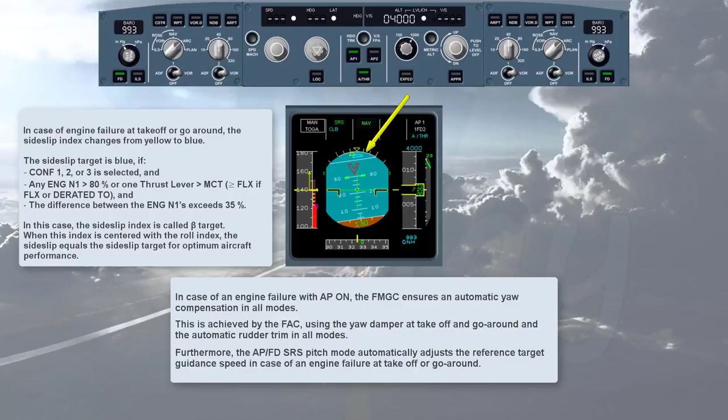Low speed protection is achieved by the following features: the auto thrust speed mode, the low energy warning, the alpha floor protection, and the wind shear protection. When the auto thrust is on and in speed mode, if the speed target is selected by the pilot on the FCU and the speed target is below VLS, the auto thrust will not allow the speed to decrease below VLS.

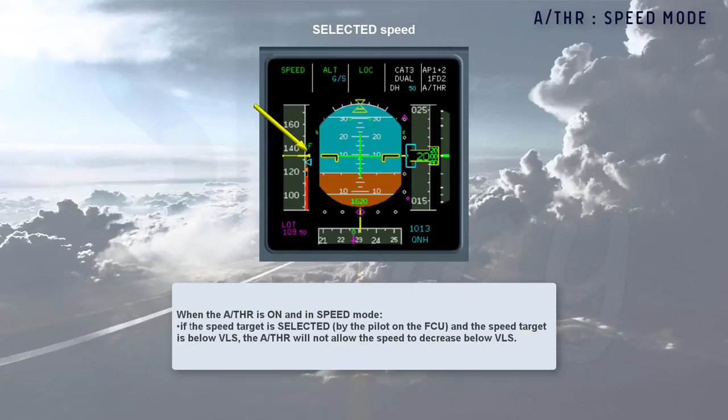Speed, speed, speed. If, for any reason such as turbulence, shear, auto thrust off, the aircraft speed drops significantly below VLS, a repetitive speed, speed, speed aural warning is automatically triggered by the FAC. It drives pilots' eyes to the speed scale, so as to readjust thrust, for example.

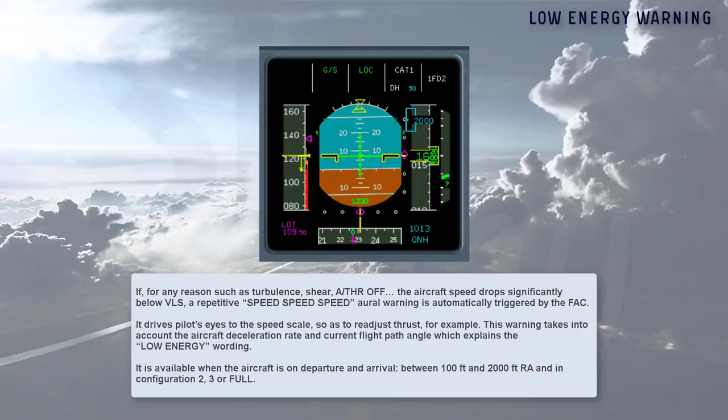This warning takes into account the aircraft deceleration rate and current flight path angle, which explains the low energy wording. It is available when the aircraft is on departure and arrival between 100 feet and 2000 feet radio altimeter and in configuration 2, 3 or full.

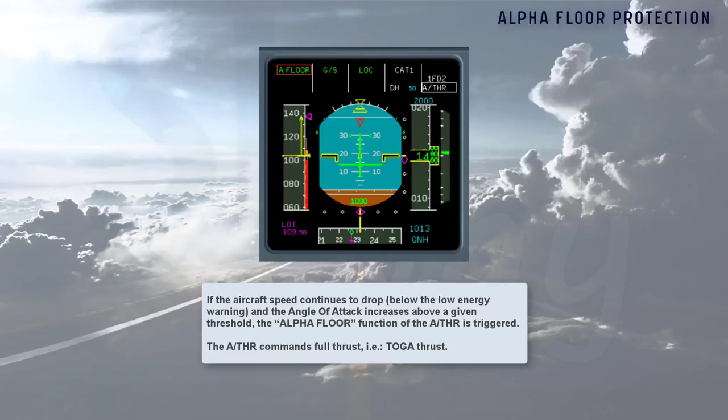If the aircraft speed continues to drop below the low energy warning and the angle of attack increases above a given threshold, the alpha floor function of the autothrust is triggered. The autothrust commands full thrust, i.e. TOGA thrust. The angle of attack threshold, which triggers the alpha floor protection, is processed by the FAC as a function of aircraft parameters such as configuration, weight.

When alpha floor is triggered, autothrust is turned on if it was previously off, indicated by a white autothrust on the FMA. Alpha floor in green is displayed as the autothrust mode. The alpha floor function is available from liftoff down to 100 feet radio altimeter.

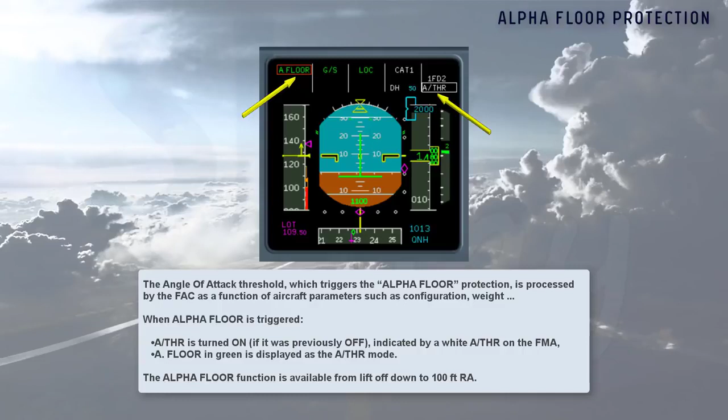Note: the alpha floor protection is lost in cases of combinations of failures such as SFCC1 and FAC2, or both FMGCs, or the alpha floor protection is also lost in case of engine out when slats flaps are extended above configuration 1.

When exiting the alpha floor conditions, the autothrust mode reverts to TOGA lock mode, which indicates that TOGA thrust is locked regardless of thrust lever position. To regain thrust control, you have to switch off the autothrust. You now have manual control of the thrust. You may re-engage the autothrust when convenient.

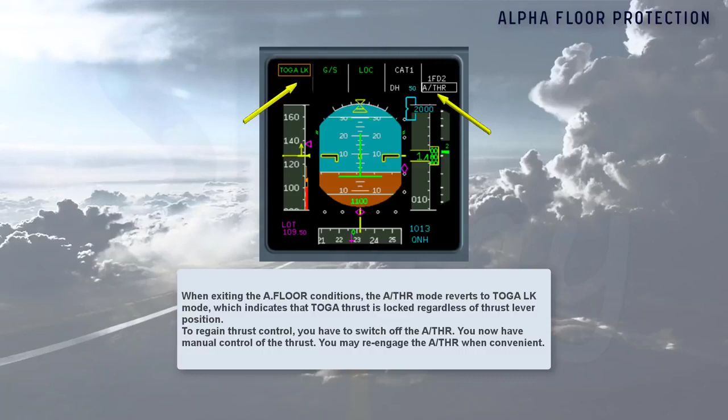Wind shear, wind shear, wind shear. If the aircraft encounters wind shear conditions detected by the FAC, a red wind shear message is triggered on both PFDs, associated with an aural wind shear, wind shear, wind shear warning. This reactive wind shear warning is available from liftoff to 1300 feet at takeoff and from 1300 feet down to 50 feet during landing, with at least Conf 1 selected.

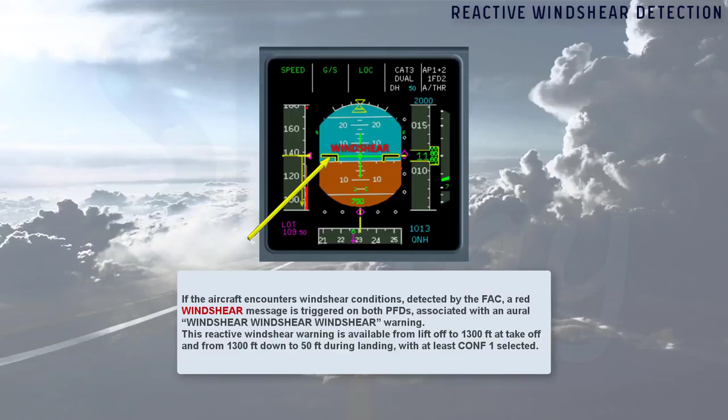The FMGC provides the following protections against wind shear. At takeoff and go-around, with the Autopilot Flight Director Speed Reference System vertical mode, which commands a pitch, ensuring a minimum positive rate of climb despite a potential speed drop. In approach, with the ground speed mini function, the managed speed target in approach is automatically adjusted with wind variations so as to ensure that the aircraft ground speed does not drop below a minimum value.

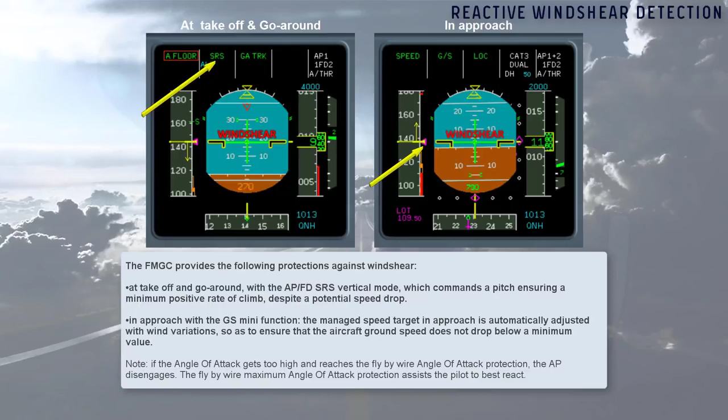Note: if the angle of attack gets too high and reaches the fly-by-wire angle of attack protection, the autopilot disengages. The fly-by-wire maximum angle of attack protection assists the pilot to best react.

Let's now review the mode reversions of Autopilot Flight Director and Auto Thrust. The mode reversions are automatic mode changes which allow a comprehensible autoflight system behavior when the pilot modifies a target on the FCU, happen in case of loss of navigation mode, and ensure a flight envelope limit speed protection.

Let's review the reversion due to FCU altitude changes. Autopilot is on. Suppose we are in climb, using either open climb or climb to flight level 250 as cleared by ATC. While crossing flight level 225, ATC requires us to level off at flight level 220. We therefore select the FCU target altitude to flight level 220.

The Autopilot Flight Director vertical mode reverts to vertical speed on the current vertical speed value. Notice also that altitude blue is not armed. It is then up to the pilot to decide how to regain flight level 220, by dialing the desired vertical speed target, i.e. down to -1000 feet, or by pulling the altitude selector to engage open descent. Note, you can imagine the same scenario in descent.

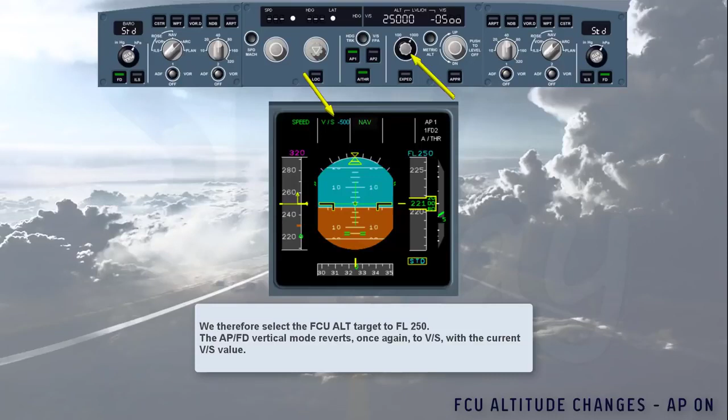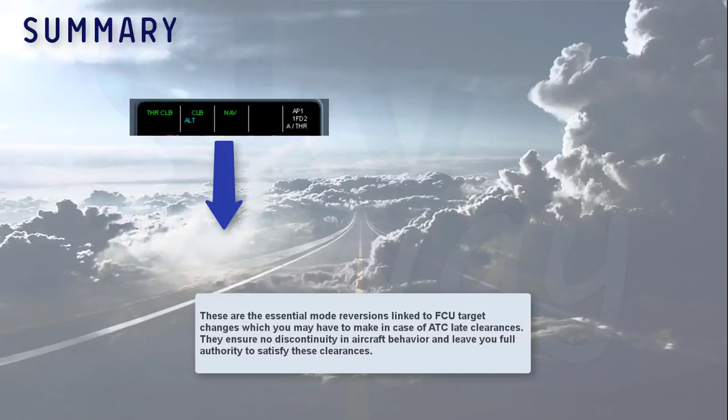It is now up to the pilot to decide how to regain altitude target, by pulling the altitude selector to engage open climb, or by dialing the desired vertical speed target, i.e. up to plus 1500 feet. These are the essential mode reversions linked to FCU target changes which you may have to make in case of ATC late clearances. They ensure no discontinuity in aircraft behavior and leave you full authority to satisfy these clearances.

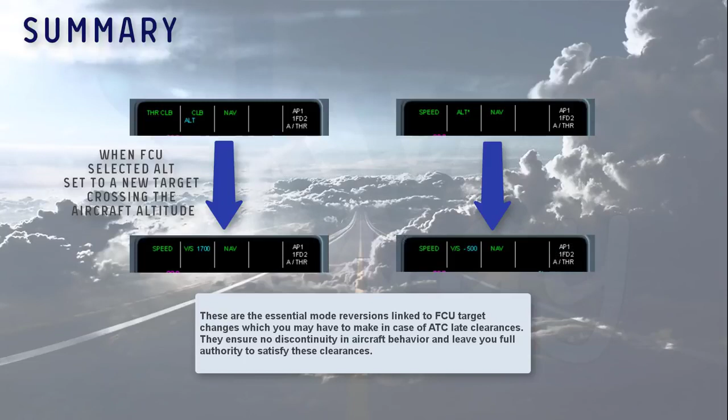Let's review the reversion mode due to the loss of navigation mode. Suppose we are in climb using climb to flight level 150 as cleared by ATC. While reaching flight level 90, ATC requires us to turn to heading 340. We therefore select the FCU target heading to 340. The Autopilot Flight Director vertical mode reverts from climb to open climb as the lateral mode navigation is replaced by heading. The aircraft pitch behavior is unchanged.

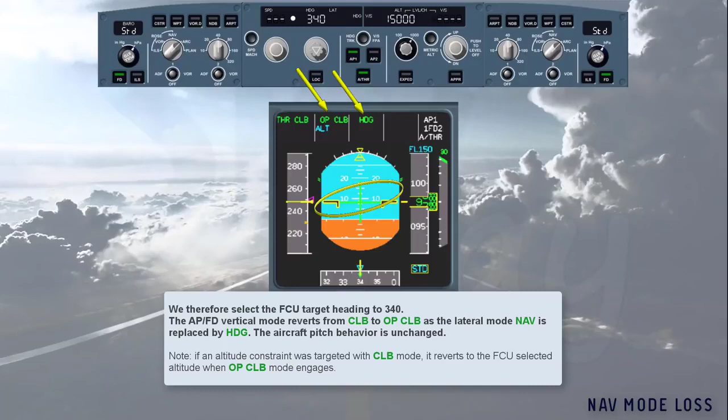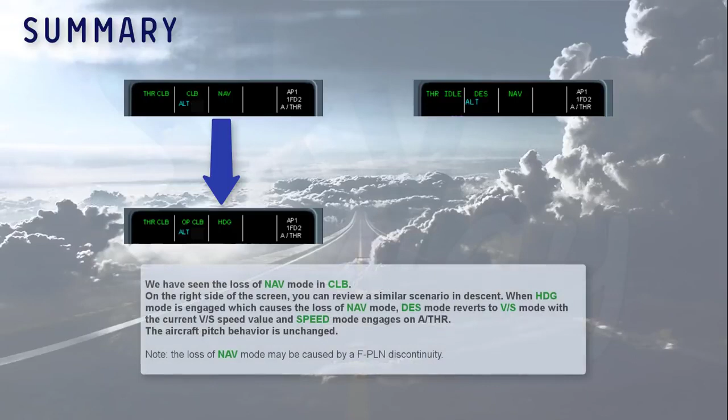Note, if an altitude constraint was targeted with climb mode, it reverts to the FCU selected altitude when open climb mode engages. We have seen the loss of navigation mode in climb. On the right side of the screen, you can review a similar scenario in descent. When heading mode is engaged, which causes the loss of navigation mode, descent mode reverts to vertical speed mode, with the current vertical speed value, and speed mode engages on autothrust. The aircraft pitch behavior is unchanged. Note, the loss of navigation mode may be caused by a flight plan discontinuity.

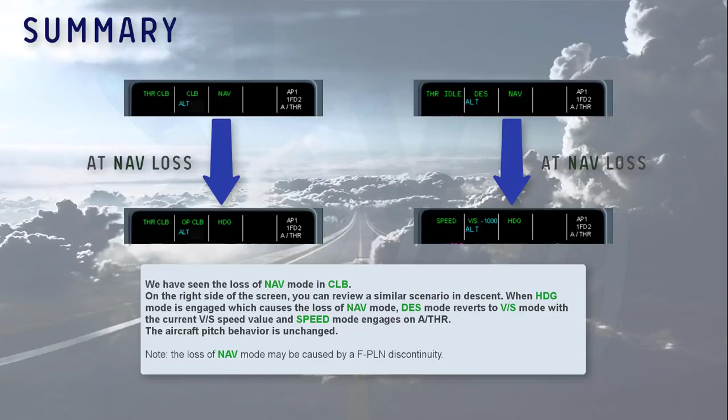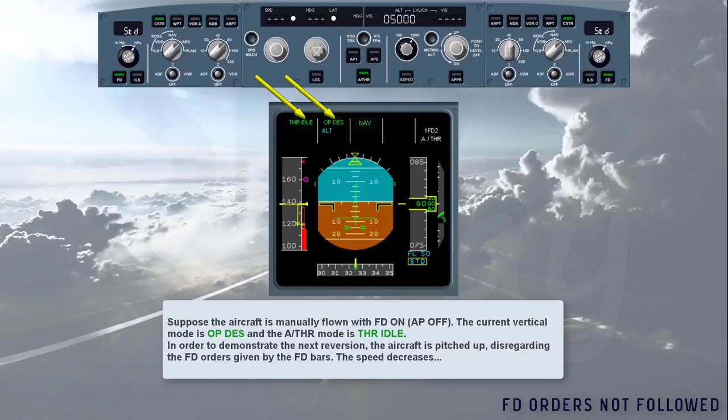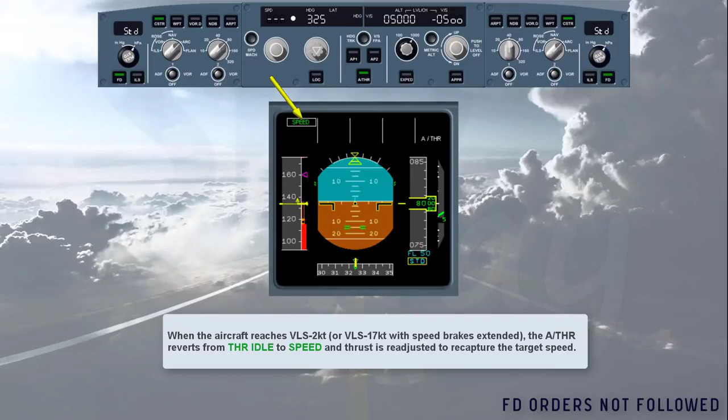When the aircraft reaches VLS minus 2 knots or VLS minus 17 knots with speed brakes extended, the autothrust reverts from thrust idle to speed, and thrust is readjusted to recapture the target speed. Let us see another case. This time we are in climb with thrust climb, open climb modes engaged. For any reason, we do not hand fly the flight director pitch bar, and we pitch the aircraft down. The speed increases.

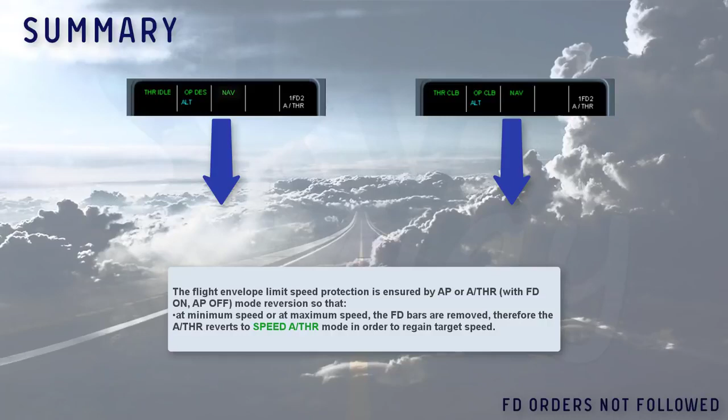When the aircraft reaches Vmax plus 4 knots, the autothrust reverts to speed mode. Thus, the thrust decreases to recover the target speed. Note, depending on the aircraft configuration, Vmax can be VMO, VLE or VFE. The flight envelope limit speed protection is ensured by autopilot or autothrust with flight director on, autopilot off, mode reversion, so that at minimum speed or at maximum speed, the flight director bars are removed. Therefore, the autothrust reverts to speed autothrust mode in order to regain target speed.